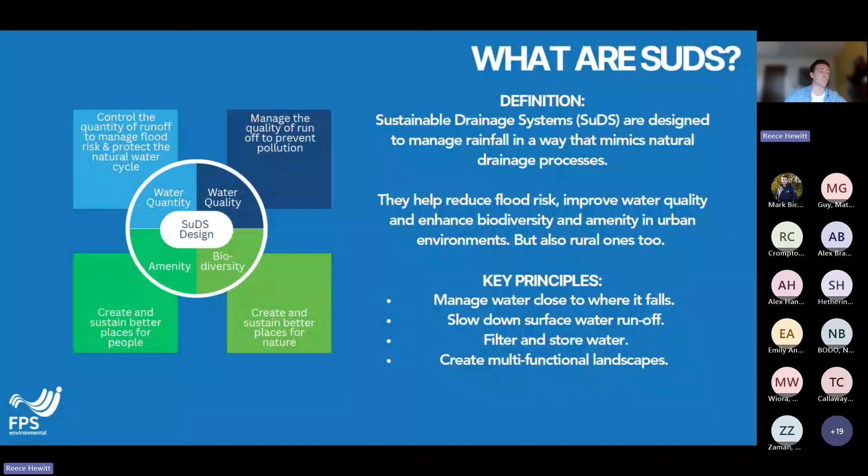That image on your left there is the 4 pillars of SuDS: water quantity, water quality, amenity, and biodiversity. Those are the core principles of SuDS, and we'll be coming into each one of those 4 cornerstones later in this webinar.

So there are 7 standards to the updates that occurred earlier in the year, and we'll be going through from standard 1 to standard 7. Standard 1 refers to runoff destinations and managing water as a resource. It essentially decides where runoff goes and emphasizes treating runoff as a resource, not waste.

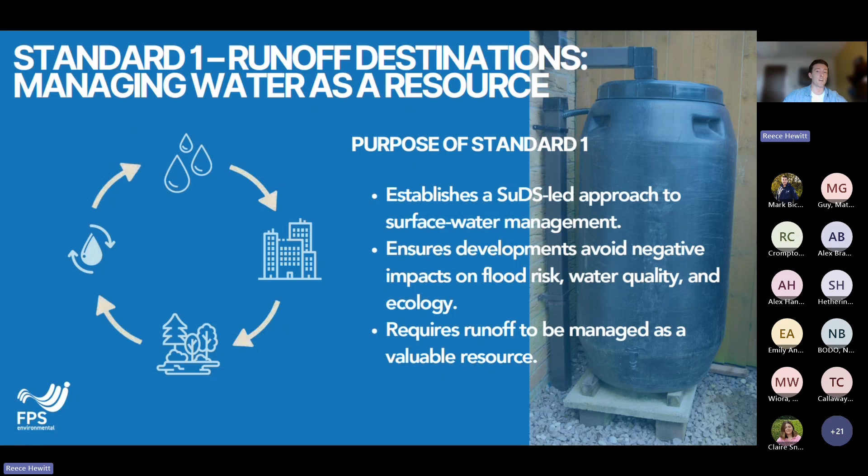Standard 1 introduces the biggest cultural shift in the SuDS standards. It no longer asks how do we get water off the site, which was the old approach, but rather how can we best use and manage the water and runoff on the site as a resource. And in order to do that, there's a drainage hierarchy to follow.

So this is called the runoff hierarchy, and it's associated with standard one. So the standard sets a strict hierarchy for where runoff should go and where it should be prioritized. So that starts with reuse. So, for example, collect for non-potable use, such as rainwater harvesting, water butts.

And then the second hierarchy option is infiltration. So, can you infiltrate that water into the ground? Can you use soakaways, permeable paving? And then a third hierarchy option is discharge to a surface water body. So can you sort of channel overland flow into a swale? What can go into a pond or river?

And then the fourth and fifth options of the drainage hierarchy is sewers, and last of all, combined sewers. But combined sewers are an absolute last resort. Ideally, you want to be hitting the first three options of the hierarchy, as options 4 and 5 are less desirable.

So in terms of developers and designing SuDS, you must show evidence that you've explored every higher priority option before going down to a lower one. And a key point of that is money and cost can't be an option for going to a lower hierarchy option.

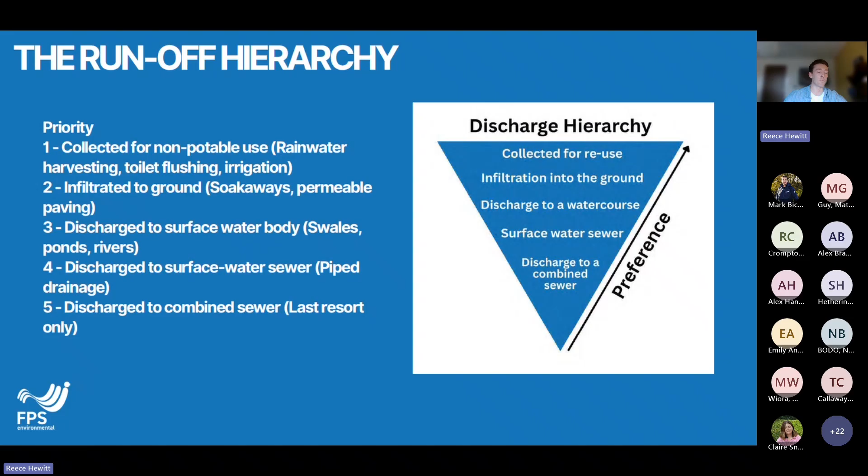So you'll need to show a bit of evidence and justification for your reasoning for where you're going to discharge your runoff water to. And you need to prove that you've maximised the higher priority options. So local planning authorities and lead local flood authorities will expect to see proof that you've done that. So proof means site investigations, it means infiltration tests, it means reuse feasibility studies to show that you genuinely can't achieve a higher hierarchy option.

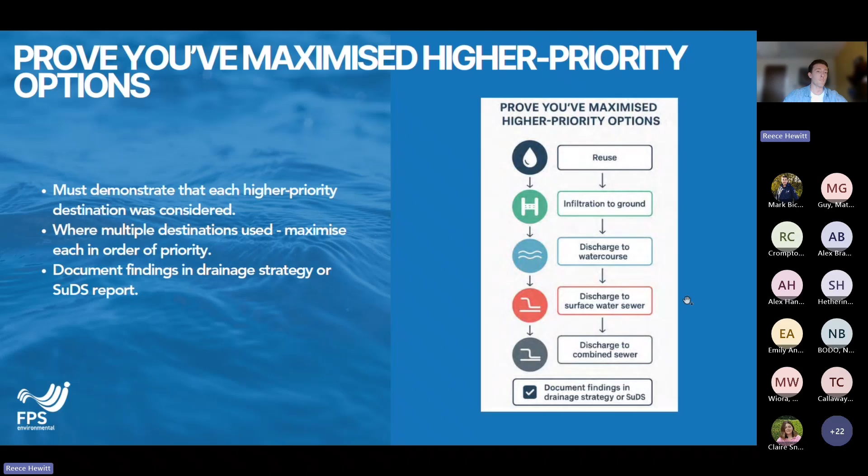And this all needs to be done at the outset of any design or development. It can't be done as an afterthought. So how you're going to manage your surface water and flood risk needs to be designed from the outset. So how this changes project design. The hierarchy compliance now affects all aspects of the site. It affects the site layout, it affects the materials to be used, and it even affects the building plumbing design. So early engagement is key.

So for developers, you need to integrate water reuse and infiltration early in the design process. Like I just mentioned, then you need to conduct initial testing. That could be ground infiltration tests and reuse assessments. And you need to coordinate this with the landscapers and architects to fully incorporate how you're going to manage your runoff and where it's going to go into your initial design.

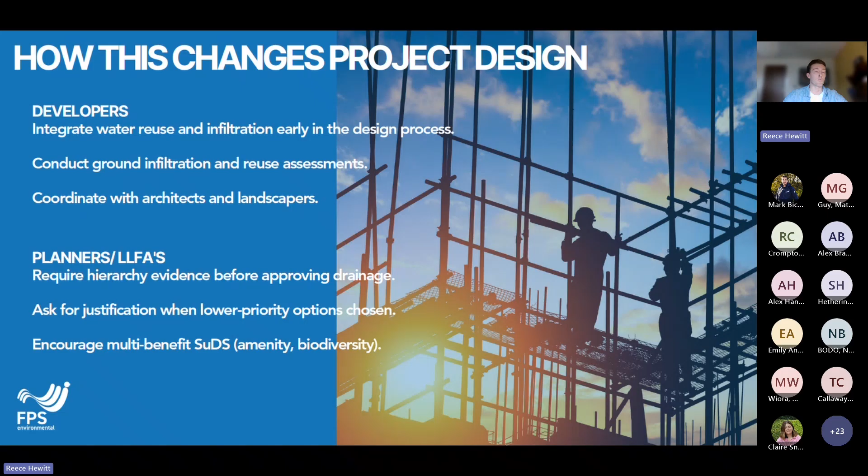And in terms of planners and lead local flood authorities, you will need to require hierarchy evidence before approving any drainage. So ask for justifications in terms of why the developers are wanting to manage their runoff in this way as opposed to this way. And that should all be backed up by evidence and testing.

So that more or less covers standard one. Like I say, standard one is essentially the cornerstone of the new updates to the SuDS standards. So if you remember one thing, it's to document your hierarchy decisions, as that is what essentially will make or break the compliance under the new SuDS standards. So treat runoff as a resource, not waste. Follow and evidence the hierarchy. Don't rely on sewers unless absolutely necessary. And early collaboration between design and planning teams saves work.

Early collaboration also saves time and it also saves cost because if you don't collaborate early on, then you're likely going to come across some rejections later on in the development, which is then going to lead to delays, resubmissions, and it's essentially going to make it more difficult to integrate SuDS into the design. So it needs to be thought about early.

So we're moving on to standard two now. Standard two out of the seven standards. So essentially, we now know where water will go, which is standard one. So standard two focuses on how much and how fast water should be released from your site. So standard two focuses on what we call everyday rainfall, those small, frequent rainfall events that make up most of our annual rainfall. The aim is to make sure that the first 5 millimeters of rainfall doesn't leave the site.

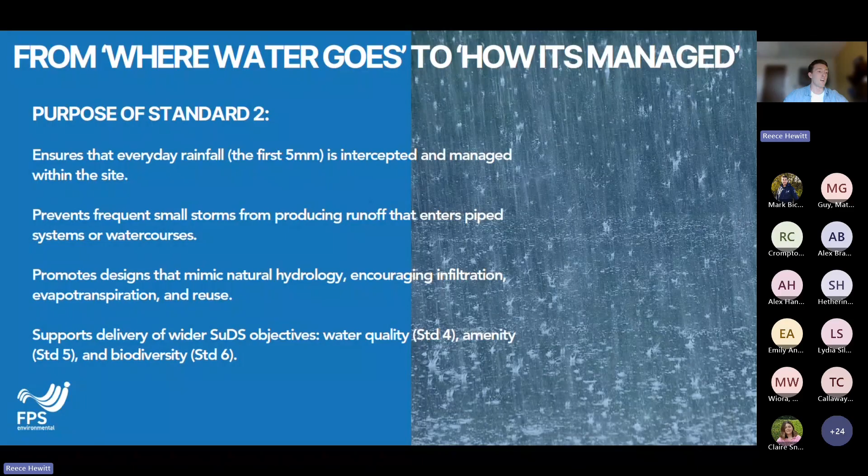So obviously you need to show a bit of compliance. Ideally, you want to look at intercepting approximately 80% of runoff from summer rainfall events and approximately 50% of runoff during winter rainfall events. So you're effectively designing your site to behave more like a natural landscape for the smaller, more frequent rainfall events.

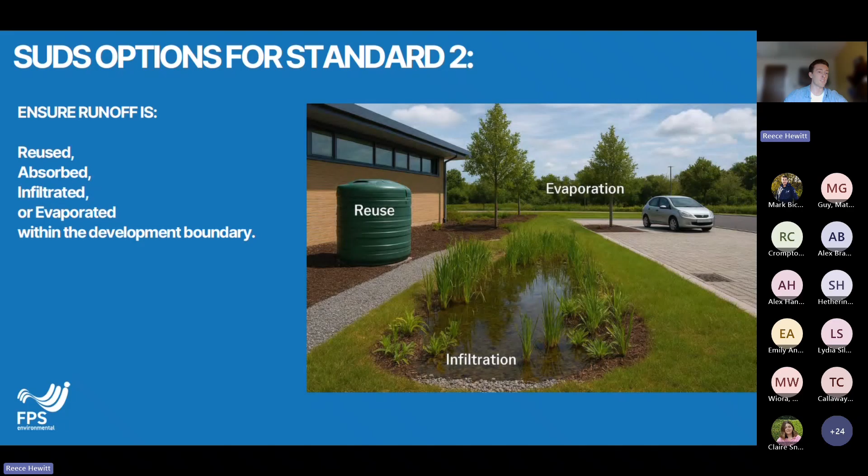And there's a few options to achieve this in terms of SuDS design. So the next few slides are basically a few options for managing runoff at your site to capture that first initial 5 millimeters of rainfall. And these next few slides focus on standard two: where can we do any reuse? Can we do infiltration? Any storage or evaporation options?

So one of these options is green roofs. Most green roofs are very effective at holding back the first 5 to 10 millimeters of rainfall before any runoff occurs. So that in turn slows the amount of runoff that will be dissipating into the drainage infrastructure at a given time. It prolongs that, so it takes the pressure off the drainage system and reduces the risk of any potential backflow occurring.

Green roofs are particularly common and good for small sites with space constraints. So they're ideal for urban sites with limited ground space. They can be used in rural locations. I know in the northwest up here we do have quite a lot of motorway service stations which actually do have green roofs. Probably because it rains a lot in the northwest, but it can be a good option for urban sites.

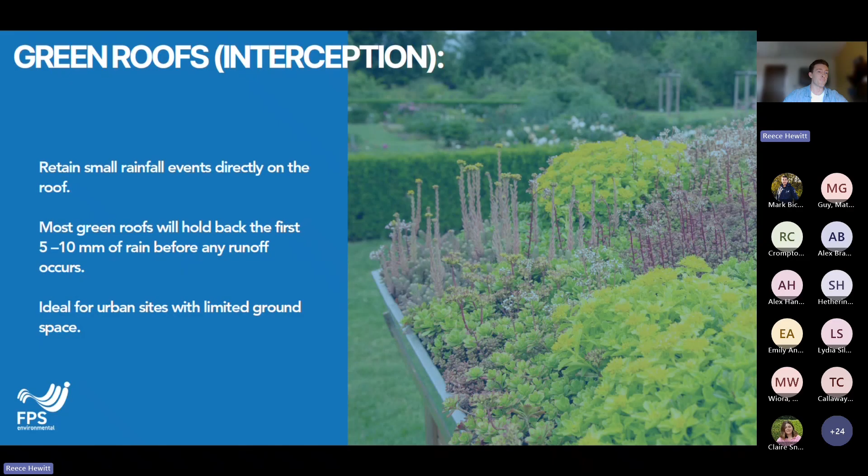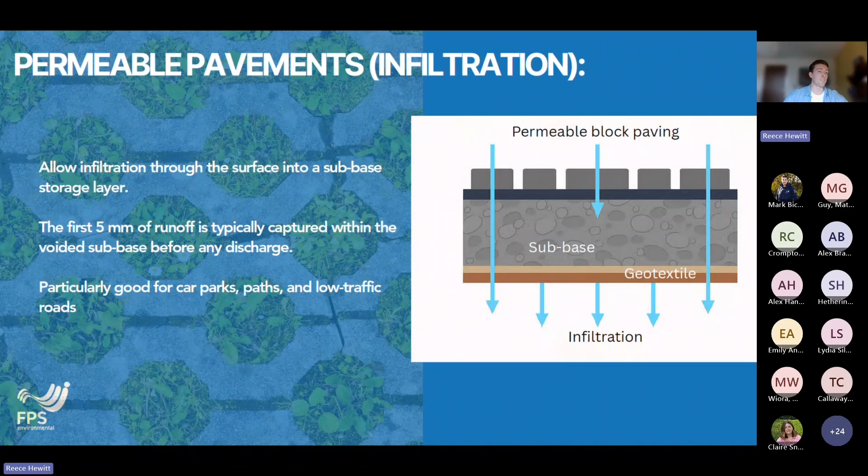Permeable paving can also be a good option to intercept and infiltrate that first initial 5 millimeters of rainfall. It's particularly good for car parks, paths, low traffic areas, particularly residential driveways. Obviously, before any infiltration or permeable paving is implemented at a site, you will need to do some initial testing just to prove that it will work with calculations. If you're situated above a clay bedrock, clay has quite poor infiltration rates, so you're probably not going to want permeable pavements because it's going to have little impact on runoff.

Another option is rainwater gardens and bioretention areas. These are essentially areas of vegetation. The idea is that runoff will flow into these areas. So quite often these areas need to be designed at a topographic low point, or certainly an area where runoff is going to run onto. Any runoff will get intercepted by these rainwater gardens, and they can help infiltrate water into the soil. They can also help store water on the surface as well.

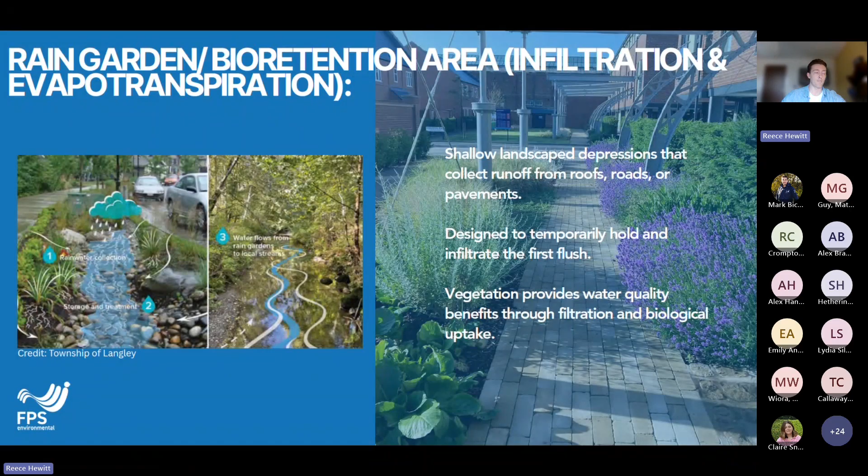And a particularly good benefit of rainwater gardens is they actually treat the water and purify it, just in case there's any pollutants in the water. And we're going to come on to pollutants and treating water in a little while because it forms part of the later standards.

And the final option, I mean, obviously there's more SuDS options, but we're just going into a few here: swales. Swales are essentially shallow vegetated channels that slow water down and filter it. They're particularly good at managing the first 5 millimeters of rainfall during those high frequency, low risk rainfall events. They can absorb water and transfer it into another area, maybe a surface water body. You often see these in new build housing estates and by the sides of roads sometimes now.

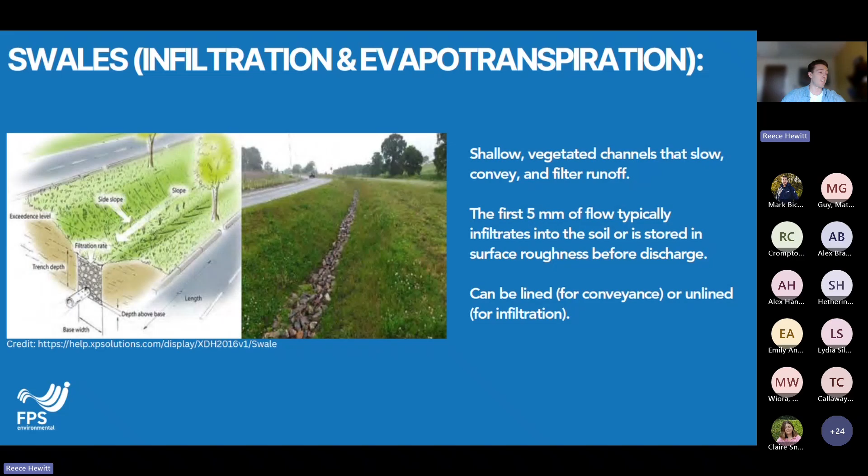So how can developers ensure that standard two is met? I think the key principle here is again similar to standard one, and it's to plan early. Developers need to integrate interception into the concept and layout stage of the design. You can't leave it to detailed design. It needs to be done early. You need to identify where the rainfall lands and how it can be managed as close to the source as possible. And you also need to design each surface at your site.

So what are the roofs going to consist of? What are the roads going to consist of? What are the driveways or surfaces going to be like? Because that is such an important factor in terms of retaining and infiltrating rainfall locally within your site. And that is what Standard 2 is all about.

You can also achieve standard two by using a hierarchical approach. So follow the SuDS hierarchy, similar to standard one, but focused on smaller rainfall events. So emphasize and prioritize reuse, collect rainwater, store it, infiltrate the runoff, so you can mimic natural infiltration.

You also need to demonstrate compliance to meet standard two. So, compliance refers to ensuring 80% interception of surface runoff during summer storms and 50% interception during winter storms. And that can all be calibrated through modeling and simple calculations in your SuDS designs.

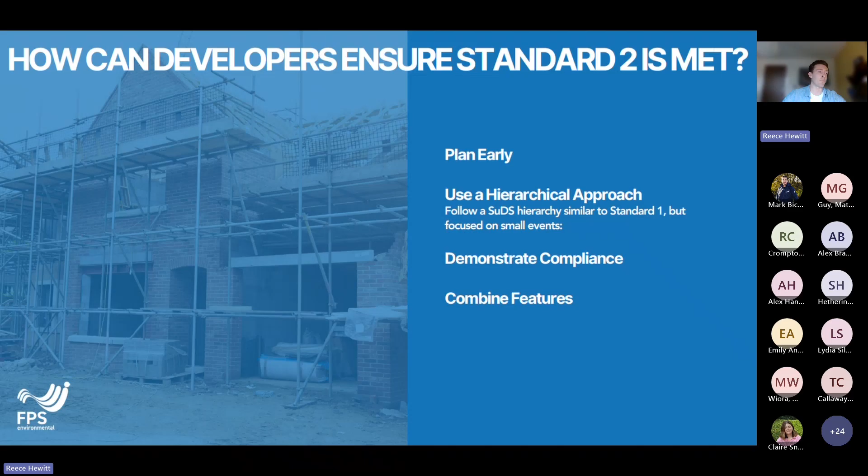And this is probably one of the most important ones, combined features. SuDS aren't just a one component fits all solution. In order to work effectively, a range of SuDS needs to be implemented at a site. And if you implement a range of SuDS, then it's likely going to work more efficiently. It's going to intercept rainfall better, and it's going to meet standard two by intercepting that first 5 millimeters of rainfall more adequately. And it also ties into standard three quite nicely, which we're just coming on to now.

So standard three refers to the management of extreme rainfall and flooding. So standard three deals with what happens when it really rains. Those big storm events, what can cause flooding if we don't design carefully. So where standard two was about the high frequency, low severity rainfall events, standard three is about the less frequent rainfall events, but those rainfall events that can cause big problems because they're quite serious in nature.

So standard three requires a SuDS-led approach even for extreme rainfall. So rather than relying on a single big tank at the end of the system, like traditional drainage methods would, we need to now design a network of features that work together to store water throughout the site. So the aim of Standard 3 is essentially twofold. You need to protect the people and the property within the development itself, but also make sure that the development doesn't make flooding worse downstream.

And to achieve that, the runoff rates need to be controlled to no more than greenfield runoff rates. And greenfield runoff rates are 3 litres per second of water per hectare. So you need to essentially treat your site's runoff as an empty field with the greenfield runoff rates, which is 3 litres of water per second per hectare. Now, obviously, some sites are urban, you have brownfield sites, and it might not be feasible to get your runoff down to greenfield runoff rates. So the new standard does allow some flexibility if it's not possible, but essentially you still need to demonstrate that you've minimized flood risk at your site.

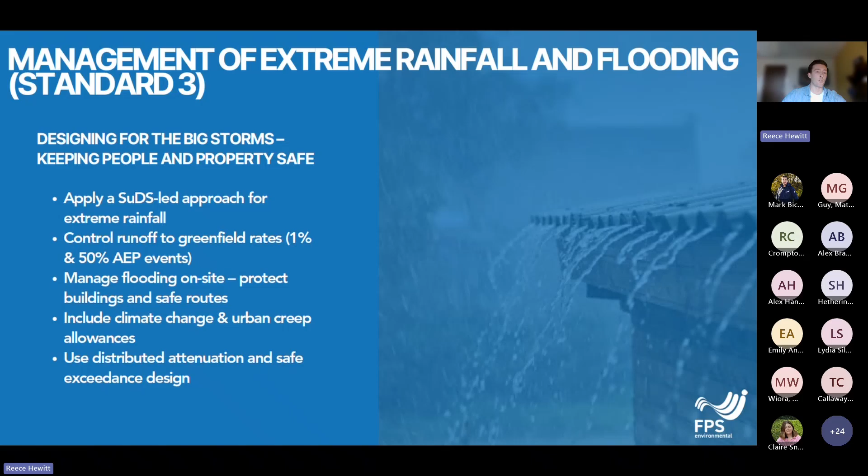And you also need to account for climate change as part of your design to address standard 3. So it's advisable to use the upper end allowance for climate change to reflect the lifetime of the development. And you also need to include a 10% urban creep, which I'll come on to on the next slide. But this emphasizes that it's good practice to have multiple points of storage, using swales, basins, rain gardens across the development, which spreads storage and slows the flow. Everything must be backed up by modelling in your design to achieve standard 3. But yeah, in summary, standard 3 is all about designing for resilience, to make sure that we're prepared for climate change and strong storm events.

So how can developers achieve standard 3? Well, to achieve standard 3, it means planning your resilience from the start. Again, planning early is key for standard 3, and it's a common theme across all the standards. You need to plan early, and if you don't, you're probably going to run into some difficulties. So you need to control your discharge. You need to spread your storage of water across your site and improve your design. Standard 3 isn't just a tick box exercise. It's generally about ensuring that in the 1 in 100 year storm, your development still functions as it would on any given day. And it also ensures that the wider community downstream is protected.

So this can be achieved using multiple SuDS features, and by applying the latest climate change uplifts. We typically are advised to use the upper end allowance for climate change, which covers the design life of the development. And you also need to include the 10% additional impermeable area, which accounts for urban creep, which is additional impermeable surfaces.

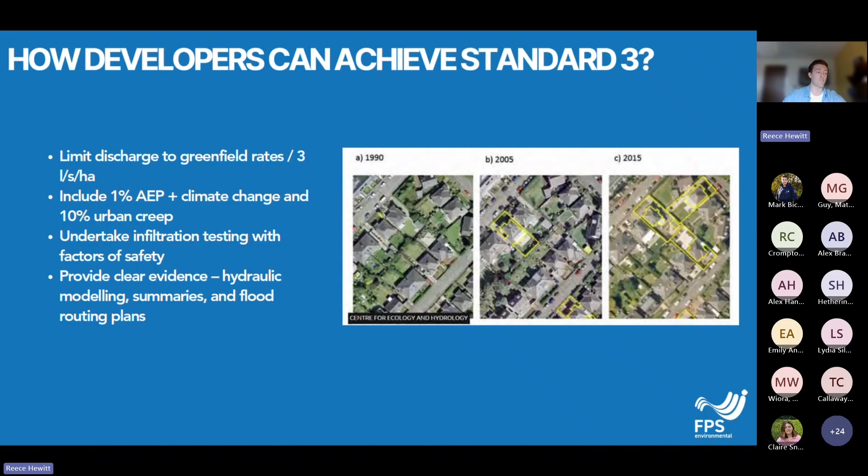So we're now moving on to standard four, towards the back end of the standards. So standard four now shifts our focus from quantity in terms of volume of water to quality. So how can we protect rivers? How can we protect our groundwater from pollution runoff, essentially? So the gist of Standard 4 is that cars and other commercial users create dirt, they create contamination, and they create pollutants which accumulate on the ground surface.

And when it rains, these accumulated pollutants can run off with the rainwater and essentially pollute downstream areas; they can pollute rivers, and they can be really quite toxic for fragile ecosystems. So we kind of need to capture these pollutants and clean the water from our site before it's discharged. So to meet the standard, SuDS designs must follow the SuDS management train and show evidence of multiple stages of treatment. So to do that, you have source controls, you have site controls, and regional controls.

So source controls can be features like swales, basins, forebays, and permeable paving. These can intercept rainfall runoff as close to the source as possible on your site. And then you have site controls, where if you do have any rainfall that falls on your site and begins to run off via overland flow, where's that water going to go? Can you design your site to channel that runoff to a particular area? Can you channel it to a swale, or can you channel it to a filter strip?

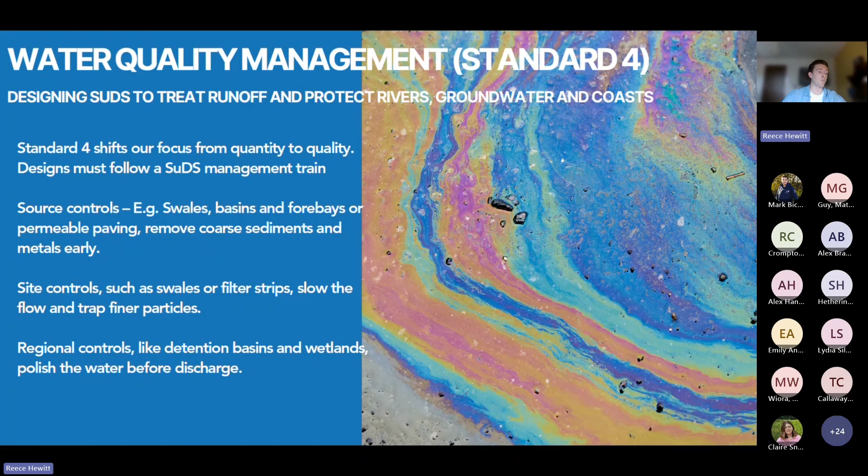So yeah, in short, Standard 4 moves us away from simply containing the runoff to cleansing it. The goal is to ensure that the water leaving the site is actually cleaner than what used to run off before the development. So this helps meet water framework and biodiversity objectives.

So we now come on to Standard 5, which is amenity. Standard 5 focuses on the human and environmental amenity benefits that SuDS can bring. So SuDS go beyond what is just drainage. They can also be used as a nice space. The key is multifunctionality.

So SuDS should manage water, but they should also create a pleasant, usable public space for people, and enhance the landscape and character. So for example, you could have a rainwater garden at a commercial site. Instead of just having it as a rainwater garden to manage runoff, you could incorporate paths. You can have some benches, some picnic areas, so it can be used as a functional site for people.

So yeah, Standard 6 now. Standard 6 just refers to the biodiversity benefits that SuDS can bring, and this is heavily emphasized in the updates. So you need to document how your SuDS scheme will enhance biodiversity and increase habitat diversity, as well as contributing to the local amenity benefits of SuDS. So Standard 6 ensures that SuDS isn't just about managing water, it's also about enhancing biodiversity throughout the site's life cycle. So again, early planning is key.

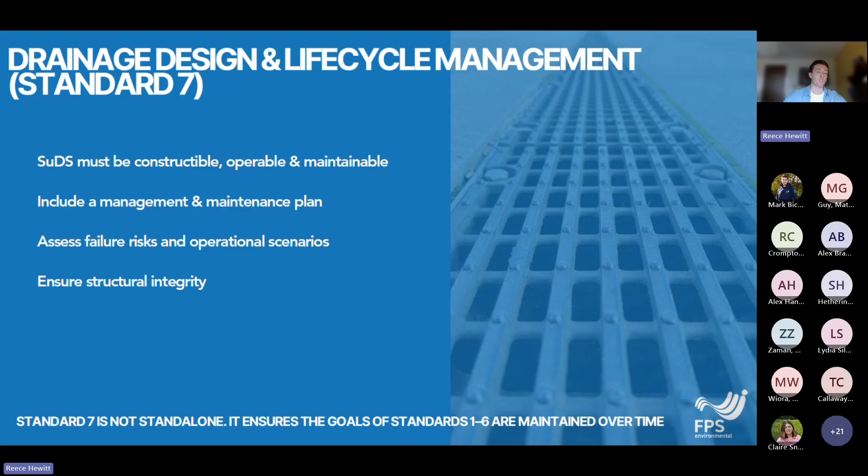There's an interesting point at the end of the screen there, which reads that Standard 7 is not standalone. It ensures the goals of Standards 1 to 6 are maintained over time. So it certainly feeds into the other standards. If you nail the other standards and comply with them, Standard 7 just ensures that it will be maintained once it's installed. So very important.

And again, that just brings us back to the 4 pillars of SuDS. Obviously, water quantity refers to Standard 1 and Standard 2. Water quality there, how can you make sure that the water runoff is pure, it's not contaminated by pollutants. Amenity, how can you design your SuDS as a functional, practical space? And again, biodiversity, how can you ensure that the SuDS features enhance the local wildlife ecology?

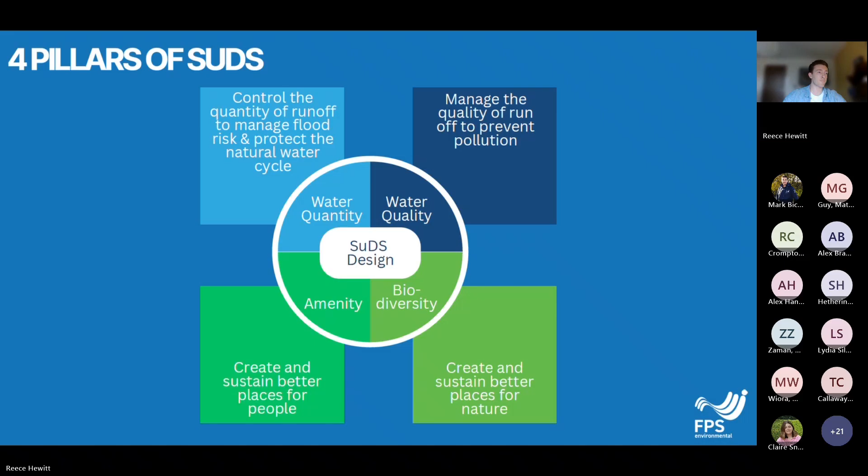So this would have put immense pressure on the drainage infrastructure. There's nothing to slow down the rate of runoff. There's nothing to store it, infiltrate it, or hold it. So this is why so many people in the past have unfortunately experienced flooding, particularly surface water flooding.